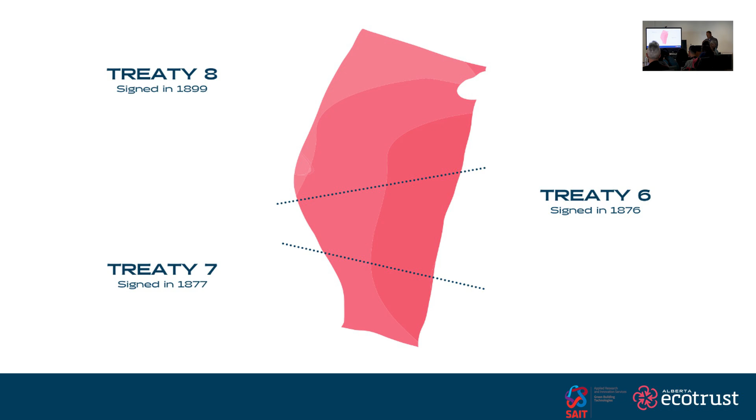So let's start with the land acknowledgement. We acknowledge the traditional lands and territories of the Indigenous peoples who have lived on these lands and cared for them since time immemorial. We make this acknowledgement as an act of reconciliation and gratitude to those whose territory we reside on or are visiting. What became known as the province of Alberta in 1905 is also the traditional and ancestral home to many diverse Indigenous peoples, including Treaty 6, Treaty 7, and Treaty 8 nations: the Blackfoot Confederacy, comprising Siksika, Kainai, and Piikani First Nations, the Cree, Dene, Nakota, Saulteaux, and the Otipemisiwak Métis government. We are grateful for the traditional knowledge keepers and elders who are still with us today and those who have gone before us.

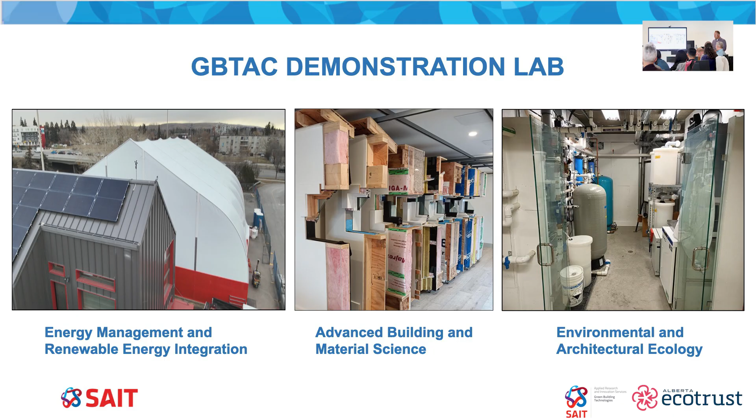We also focus on environmental and architectural ecology. That picture is a little water lab we have in our building. In the gray structure, we have a 35,000 liter cast-in-place concrete rainwater cistern. We use the water inside the building to flush toilets, and there's overflow space.

A couple other areas we've expanded into are testing services. On the left is the environmental weathering chamber. This would simulate both indoor and outdoor conditions with a wall sample about 9 foot by 9 foot sandwiched in between, and the HVAC on that side represents the exterior conditions, so warm to cold.

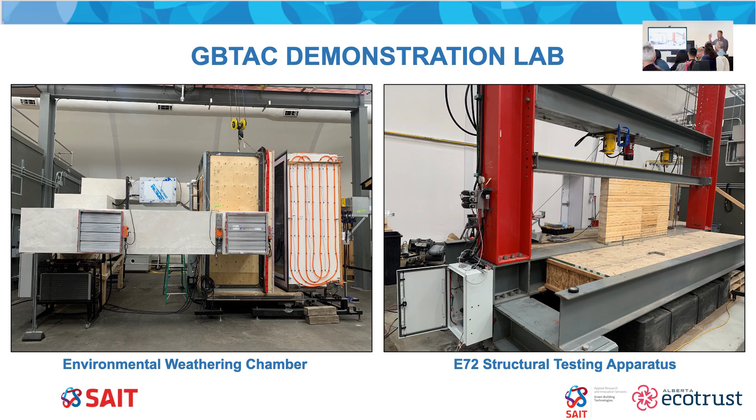Our first test was with Sprung Structures—this is the structure itself housing that test, and we tested a new membrane system for them. We got down to about -29 on that side. So we embedded the wall sample itself with a through-wall sensor stack.

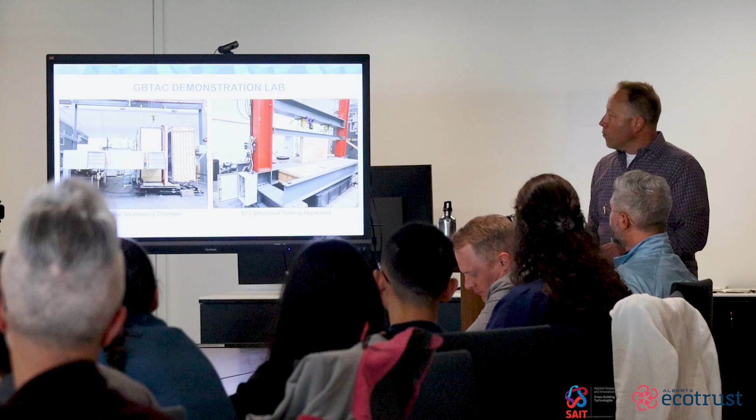We're just finishing up recommissioning of this E72 structural testing apparatus, and that's for compression, primarily compression testing.

With that, this is just showcasing our involvement in the Retrofit Accelerator project under the Ecotrust. One part of this is the Retrofit Discovery Sessions—this is our 7th of 8. We set it up as 3 in person in Calgary, 3 in person in Edmonton, and 2 online sessions.

Another part of our project is this market and gap analysis. We've focused on these main topics, but all related to the commercial retrofit.

I'm going to focus on talking a little bit more about the museum and our goals and objectives for the renovation. And I'm going to leave it to my esteemed colleagues who know much more about your areas of expertise to get into the specifics about how we've created and renovated a building that's much more sustainable and thoughtful in terms of how the building operates and how we're making sure that we're being a good steward and a good contributor to a better environmental future for everyone.

So let me talk a little bit about the Glenbow. As was mentioned, I've been here for 18 years. I honestly can't quite believe it. But when I think that actually I've spent almost 7 years working on this renovation project, it doesn't sound that bad, hey? That's how you get to 18 in pretty quick order.

Let's start at the beginning of the renovation journey. Glenbow, for many years, had on its radar that we needed to renovate this building. It's really difficult to get capital funding to renovate cultural spaces, and what's happening right now in our market is pretty extraordinary. I think we should all rejoice in the fact that governments of all levels and community members from all parts of Canada are investing in these big cultural infrastructure projects happening here at Glenbow, at the Werklund Centre, what will be happening at Contemporary Calgary, the Event Center.

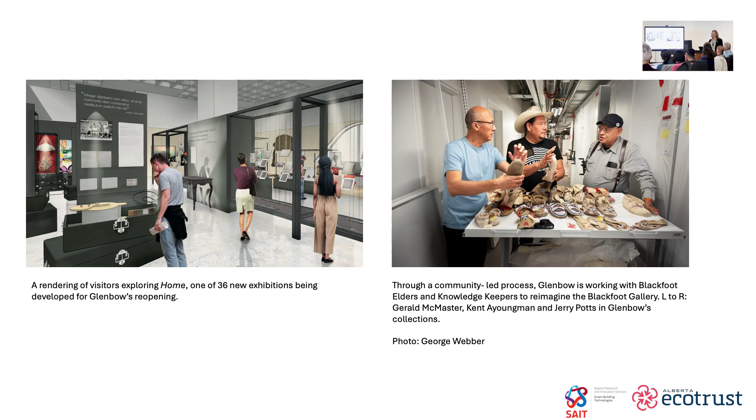In that back corner where my colleagues are sitting, we took out an exit stair. Dialog's vision, one of their early big moves for the museum's future: take out that exit stair and create a front door, which we didn't have before at street level. These sound like simple things, but really important. When you're a nonprofit, you better have everything working in your favor, because life's hard enough on all the other fronts, so let's get a front door. So that was a big win for us.

But we also have a collection that we have stored on site here. And we kept it on site throughout the renovation, and I know that was probably a daily challenge for everybody. Regan will maybe speak to some of that. But we also had to make sure that how we were renovating this building was being done to maintain our commitments as stewards of the 250,000 objects that we kept on site here throughout the renovation.

And one of the first projects that we did as part of the renovation was to move all of our collections into new compact high-density storage systems, which you'll see a little bit on the tour. We also had to think about, in addition to the other things as part of our work and the renovation, how is it supporting our operations.

Also on the financial side, about 30% of our funding comes from the province of Alberta. The rest of it is all earned and donated revenue. So what that speaks to is, again, coming back to making sure that we have a building that's been renovated to actually work for the organization and the community.

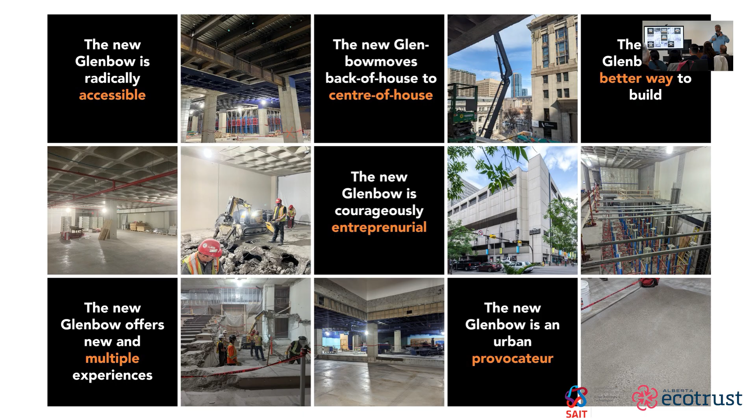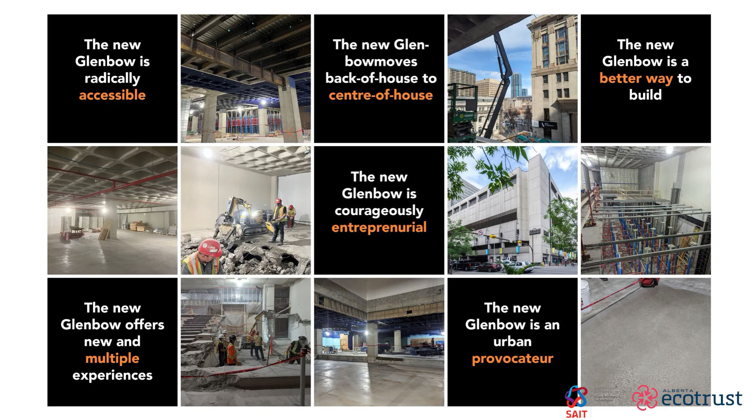So these are the 6 primary goals that, with Melanie and the rest of the team, we really focused on. So the new Glenbow is radically accessible. The previous Glenbow didn't have gender-neutral bathrooms. It had difficult ways of circulating through the museum; from elevator to stair was very disjointed and not democratic, so we alleviated that. The new Glenbow moves back of house to center of house. We wanted all the inner workings of the museum to be expressed as part of the artful experience, not just specifically in the exhibitions and galleries.

The new Glenbow is a better way to build. I've just relayed to you the amount of carbon that was saved and prevented in this building, as well as creating a building from an envelope that had 1 inch of insulation to a building that now has 6 to 8 inches of insulation on the exterior, allowing the mechanical systems to breathe a little bit more and allowing this building to function on a higher performance level. The new Glenbow is courageously entrepreneurial.

Like Melanie said, this is a non-for-profit organization, and we wanted this building to generate its own revenue by creating opportunities where Melanie and the rest of the Glenbow team could come in and rent portions of this building, making it completely accessible to all members of the community and the public.

The new Glenbow offers new and multiple experiences. I'll say this many times on the tour, but one thing I love so much about this building is if you were to design a similar building with the same type of program and function of the Glenbow as a new build, you would never get the types of spaces and the creative kind of relationship between spaces as this building offered us during construction. You'll see that when we hit certain locations like the Cube Gallery, the Salon Gallery, the Theater, and the Vertical Gallery. Those are all very unique moments and spaces that no new museum would ever even imagine to create.

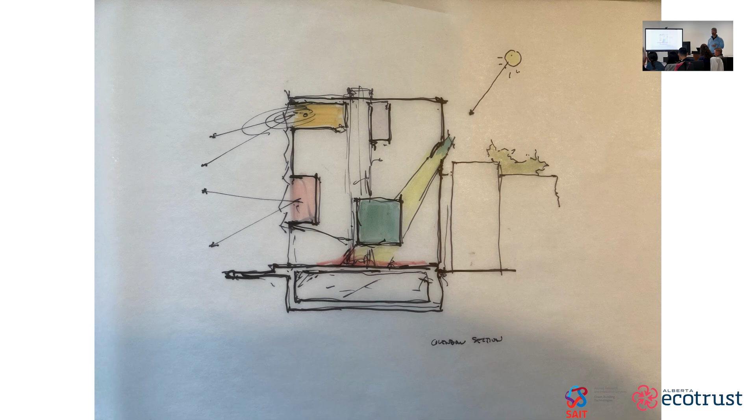This is a quick sketch. I will again say this on the tour a lot: we considered this building a pancake building. Everything was flat. There was no volume, no experience, and no kind of relationship between the various floors in the building. Our goal was to open it up, not only through the exterior, but also in the interior, giving Melanie and the Glenbow team a new offering of different spaces that allow the collections to be expressed in new and exciting ways.

So this is the new building. What we want to do here is quickly run through the architectural process. We took this building, cracked the facade open, and exposed all of the inner workings. We removed everything from the building, from the facade to the inner walls, everything down to its base structure.

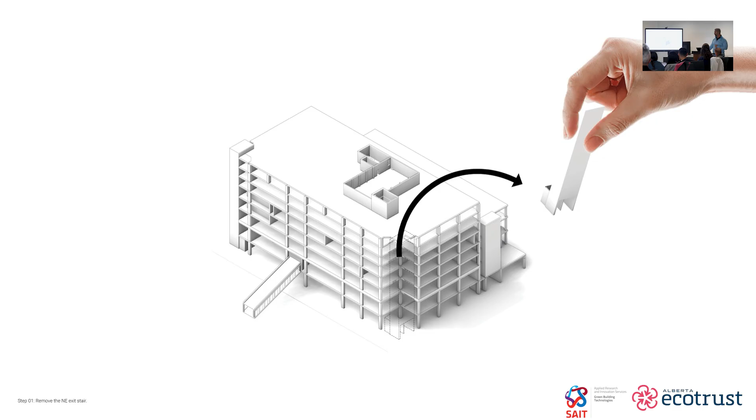We removed the Gordian knot, as my colleague Robert Claiborne calls it, the northeast stair. This was probably the most expensive and most rewarding move in the entire design and construction process, and the complexities of it are so vast.

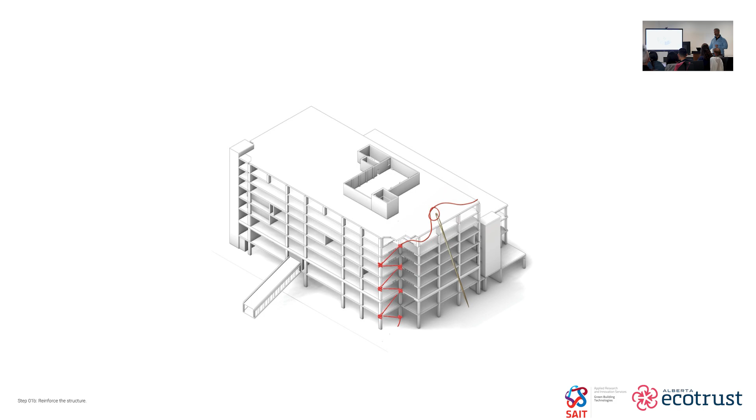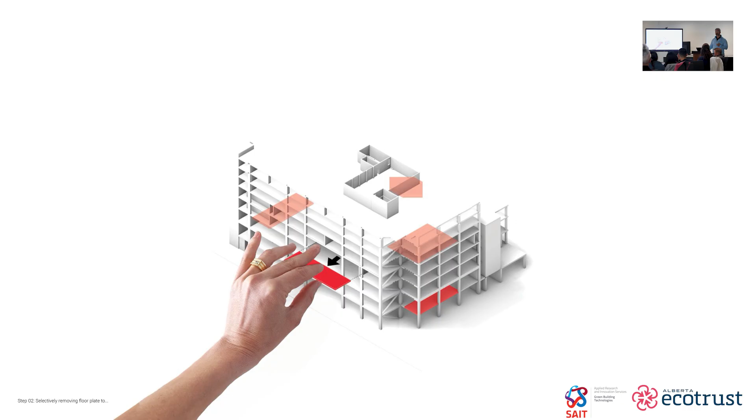By doing that, we had to stitch the building back up. Nyell wouldn't let us just have it floating there, so we had to add new structure to this building. Then we started to remove floor plates and create new and interesting volumes throughout the building, such as you can see here.

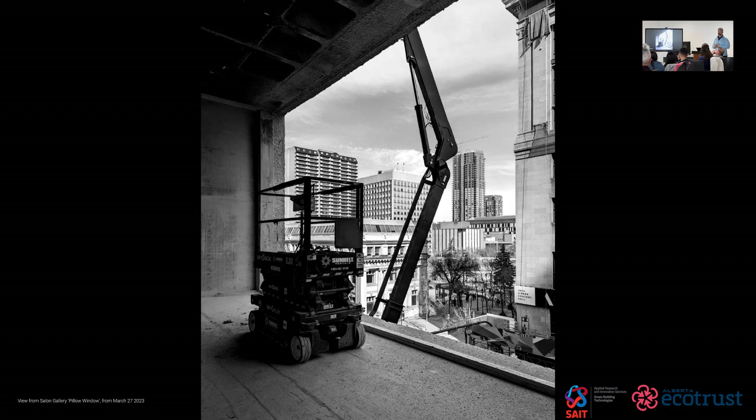This is one of the very first shots I took on site when we got to remove the exterior facade. This was a very important moment architecturally for our team, because it was the first time that Glenbow really started to interact with the urban environment. The urban environment was coming in while Glenbow was coming out, and it was this really exciting moment for us to know that we were actually going to achieve something we'd been planning for a very long time.

A little bit about the facade before I pass it off to my colleagues here. When we looked at the facade, we wanted something in a building that had more questions and offered more stories than gave more answers. So we came up with this term 'fuzzy,' because we didn't want it to give off the same kind of experience on any facade. We wanted it to drastically change all day, every day, all year round, depending on how the sun interacted with the facade, creating a shifting moment along the cladding that allowed it to change momentarily.

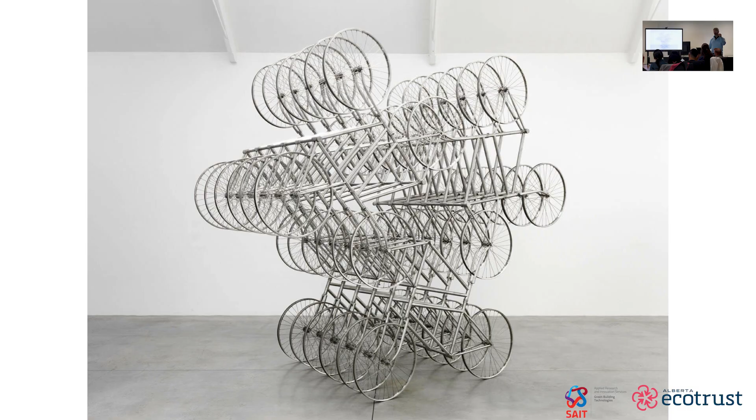We got a lot of inspiration from Ai Weiwei's interesting artwork, where he took singular items and put them together, and through that different vantage point and layering, you start to see something completely different. You start to question why you're actually seeing what you're seeing, as opposed to saying, oh, it's just a bike. So we tried to really do that with the facade. These are examples of the 3D prints that we did.

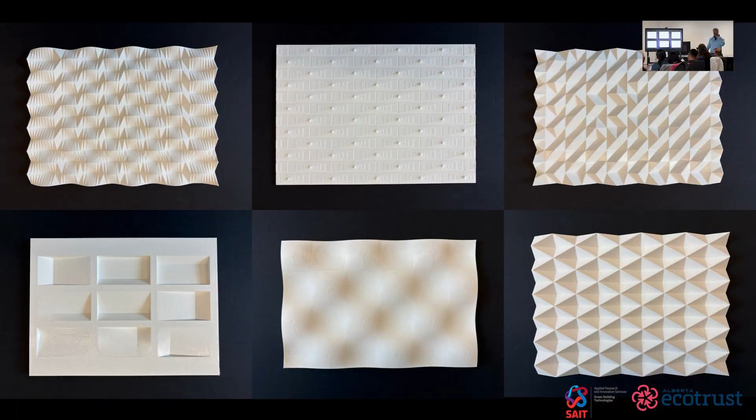We probably did about 150 different test prints of the facade cladding, and we started to get a little bit closer to where that fuzziness existed—something where the blurred lines, you don't know what is shadow versus form, what is light versus dark.

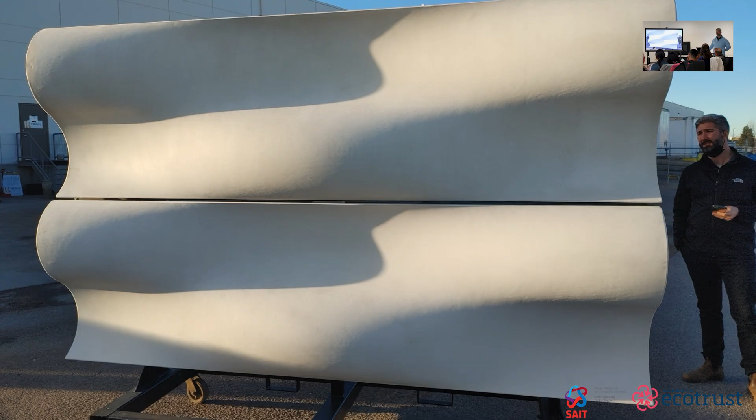This is when we started to do one-to-one scale mock-ups of the building cladding for the facade, and you can see how the sun is really interacting and playing on these panels. Imagine that just from these two, and then extrapolate that interaction over an entire facade of 8 stories.

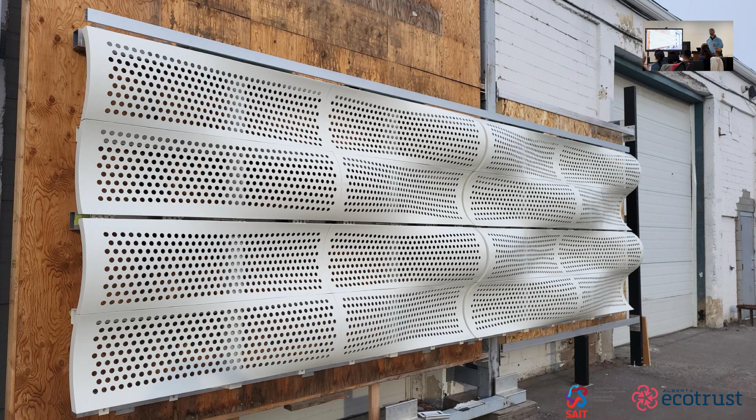We also had to integrate metal panels, since Regan had his own requirements for this facade. So how do you start to integrate a really robust, soft, malleable material like concrete with something that required 50% perforation and also matched those panels very closely?

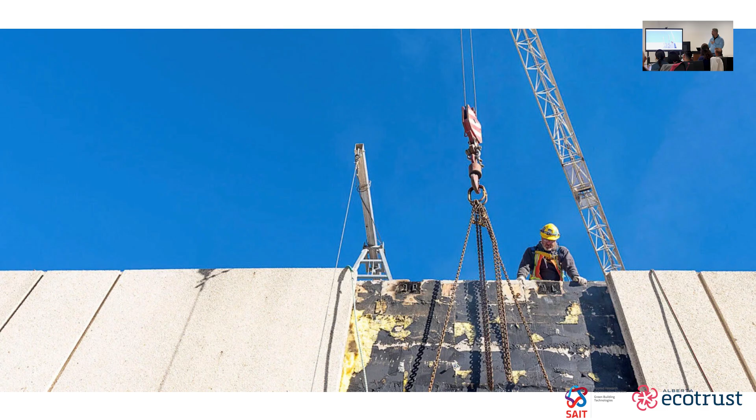These are just some quick images. Marta's going to get into that development of the building envelope, and you can see how rough a shape the existing building envelope was in when we started to remove those precast panels—something very difficult over the construction process to mitigate and make sure our envelope was extremely robust. This is us moving very strategically around the building as we developed and rebuilt that facade, and these are the finished images you see today.

This is our northeast corner of the boardroom here, just north of where we're sitting. This is all new structure in that location, with very interesting volumes, which I'm taking a tour of.

But this was a very important moment for Glenbow to reintroduce themselves into the urban environment and give them an incredible space to relocate their work.

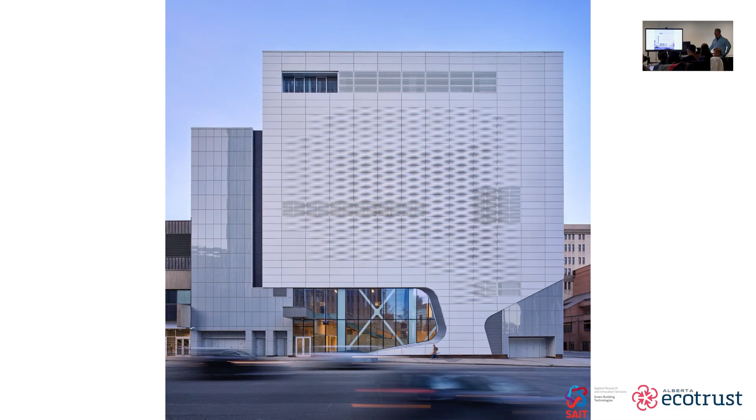This is the south elevation, where the theater is the most prominent piece of the facade. This is the northeast corner.

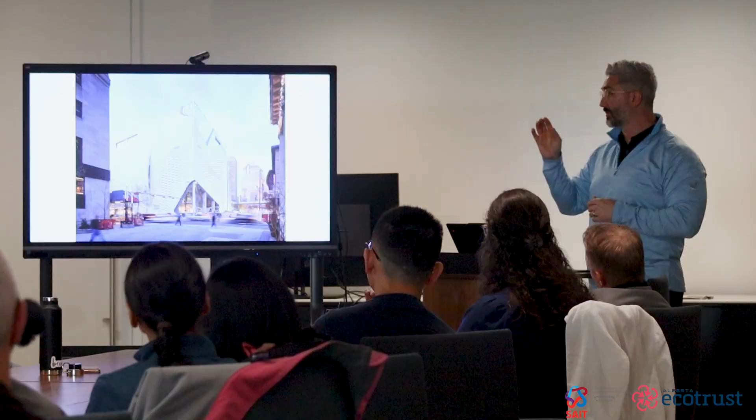Removing that northeast corner allowed us to open up the northeast entrance, providing its own entrance for the very first time. This was the most specific element where we engaged with the Indigenous community. They had a very big part of this entire project, and this was so important because at a very specific moment in early June, around 5:30 in the morning, the sun comes up exactly in that location and funnels its way through the building into the Calgary TELUS Convention Center. So there's a very strategic reason why this is exactly due east.

And then just some very provocative facade shots of the cladding. I'll pass it over to Marta.

Hi everyone, my name is Nyell Tuchscherer, as Dean has pleased. I'm a project engineer at RJC Engineers and I've been at RJC for 14 years now. It's been an honor to be part of this project—challenging, as everybody's alluded to, and very rewarding as well.

I'll speak a bit to the structural challenges we faced and what we performed with hybrids here. Just a quick overview of the building as a whole—a picture of our drawings. The one on the right in red is all of the demolition we underwent, and the portion on the left is the new structure we introduced.

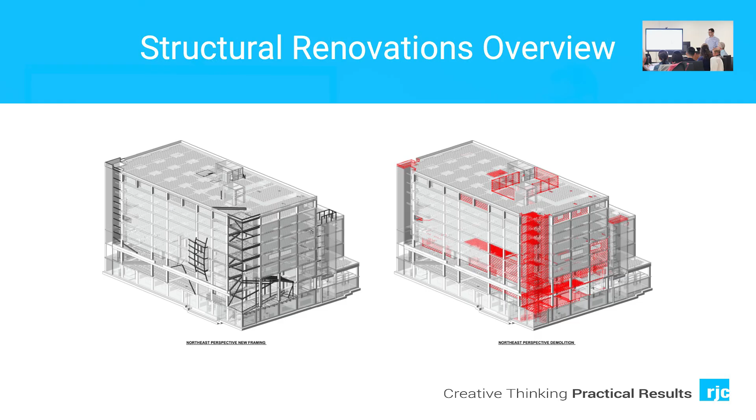As Kyle indicated, the big challenge of the project was removing the northeast stair. That formed more of the lateral system, stabilizing the building from wind loads and lateral loads, so by removing it, we had to reinstate that stability in some other method. We introduced bracing and additional walls, but the sequencing of that over construction, while allowing EllisDon to continue the renovation elsewhere, meant we had to sequence the floors working top-down and slowly introduce the lateral system back in.

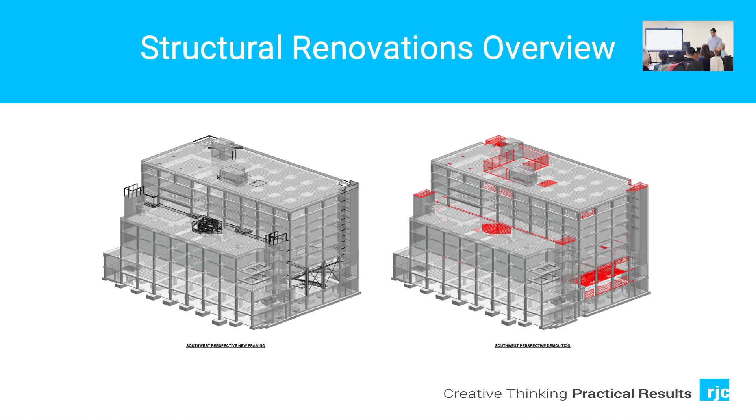We took out a portion of the waffle slab, and in doing so had to reinstate some of the structural capacity by putting in steel framing below. We worked with Dialog to optimize that and make sure we didn't have to introduce as much steel as we initially thought, trying to keep costs down, keep our carbon footprint down, and still achieve the end result, which you'll see later today.

The northeast corner, we also took out a portion of the floor to add the entrance. It's a double height space there, creating the wedge gallery, which you'll also see later today. This is the framing we introduced, with diagonal sub-framing that allowed us to reinstate the slab capacity in the adjacent bays because of removing the bay to the south.

On the level 3 portion, there's an existing double bay span, around 18 to 19 meters, consisting of post-tensioned slab. All the high stress strands had to be decommissioned, slowly cutting one strand at a time because they're under high stress, then cutting out that entire span. We worked with Kyle and his team to optimize the best location for that, so we weren't impacting the structure around it. It was a very rewarding sight when it came down, seeing that slab removed and the amount of space it gave to the museum.

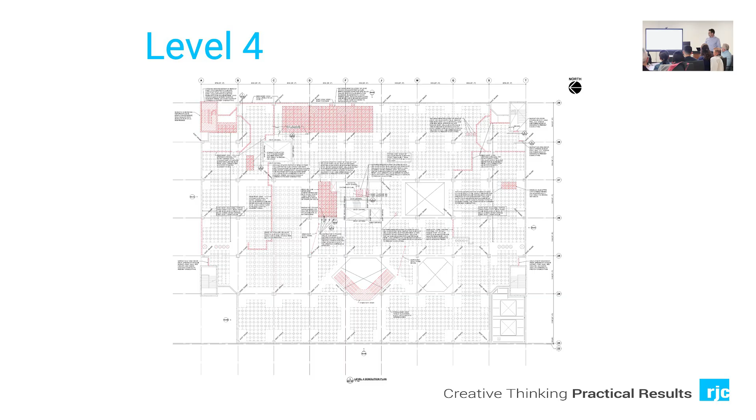Next is the level 4 space. On the northeast corner is still the stair being removed. On the east side we introduced the double height space for the salon gallery, plus the bump out or pillow window to allow light to come in. All of those spaces posed a challenge. This one in particular, we had to deal with the wind loading on this wall and the columns that were there before—they weren't designed for that 2-story wind load effect, so we had to introduce new framing.

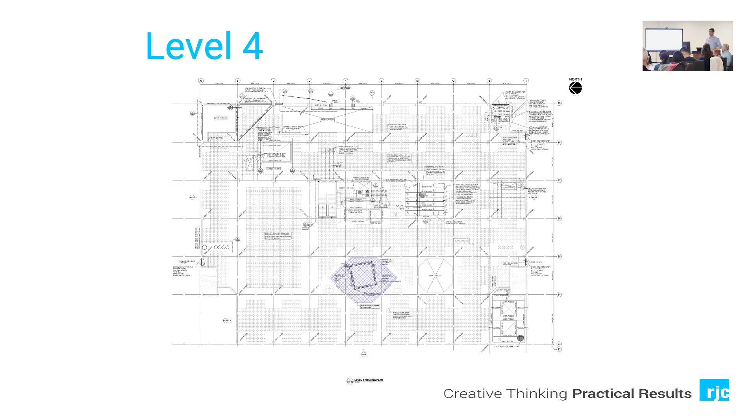On the lower floors, we introduced column jacketing, meaning we put 6 inches of concrete around the existing columns just to stiffen them up and make sure they could take that load.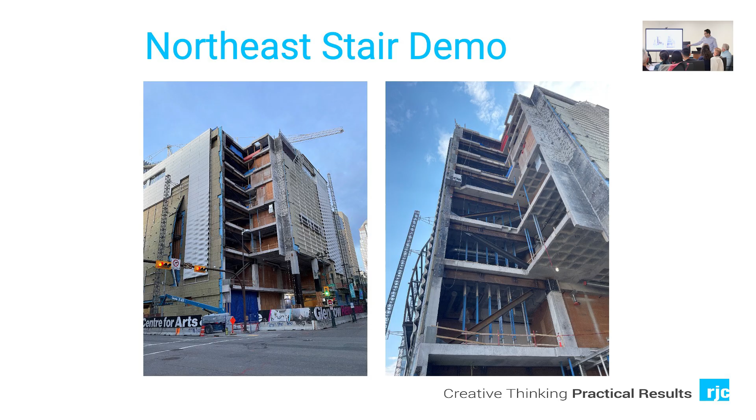Now I'll share some photos I took along the way of the renovations, because it gives a better picture of the transformation. As you can see here, this is the northeast corner with the stair removed and some of the new steel bracing that's gone in just to reinstate that lateral system.

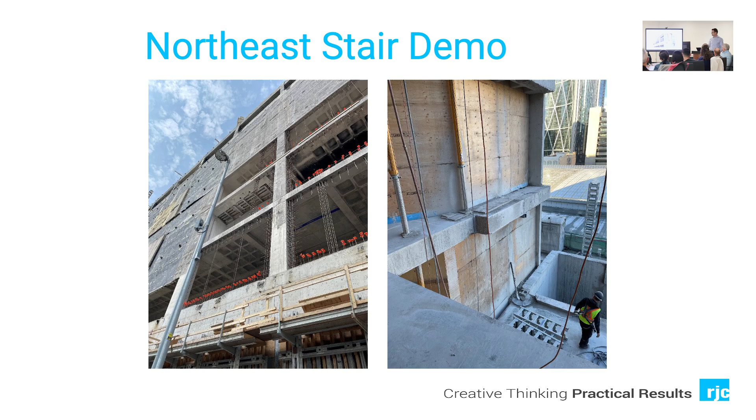One photo I found quite interesting—I took it on site when they were cutting the wall out and they managed to get their large blade stuck in the wall, so they had to demo the wall down to that portion just to get the blade out. It was pretty entertaining to see that.

Kyle shared a photo of it before, but opening up that east wall—one of the unique features of this building is an 8-inch concrete wall all the way around the entire building, going from basically level 3 all the way up. We've poked holes through this wall, but it's very robust and acts as a lateral system because of that, so we had the opportunity to introduce some openings on the upper levels.

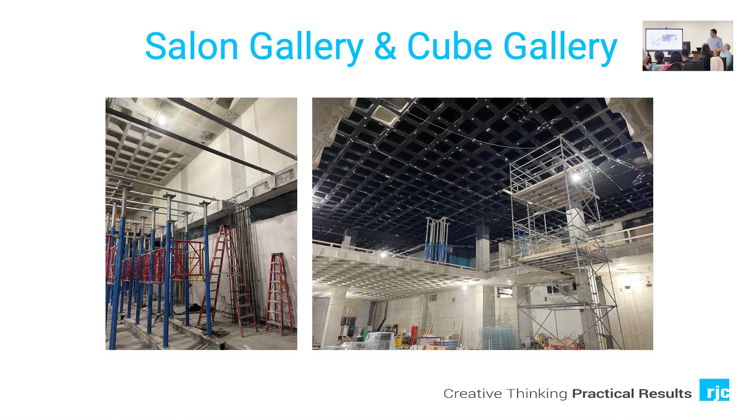Salon gallery, cube gallery—we'll see more of this today, but this is behind the scenes before all the finishes were replaced. Here you've got the PT slab that was removed, and you can see how much space it gave the facility. On the left is the salon gallery, on the east side of the building, forming part of the pillow window.

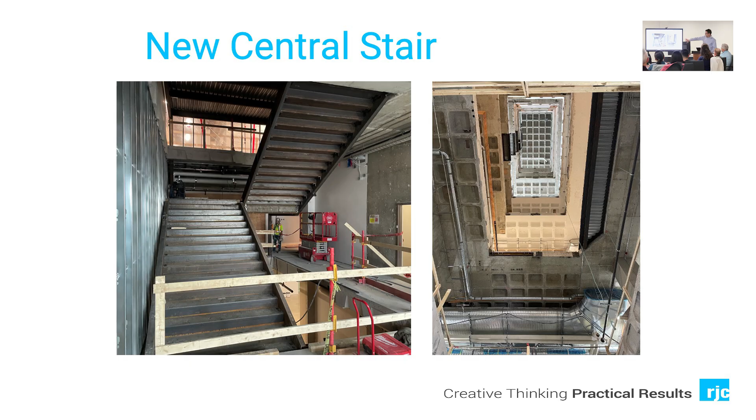New central stair—I didn't touch much on that, but that was another space where we introduced a full height stair in the middle of the building. This is looking up at the opening we put through the waffle slab. Rather than using steel to subframe that part of the building, we used FRP strapping, which is very environmentally friendly with less carbon footprint—it puts straps on the underside of the waffle slab and reuses the waffle slab to its full potential.

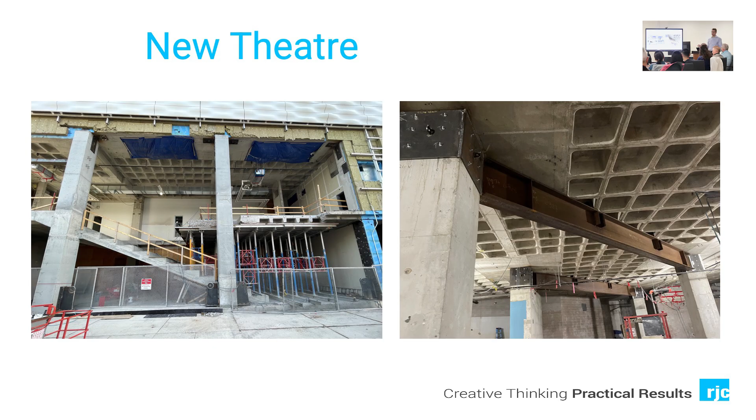New theater, here again, the cells portion of this is shown on the left, a portion of it being demoed. The challenge with pouring a new bleacher in this space was that the main floor slab is only an 8-inch slab, not a waffle slab like this, so we weren't able to form the bleachers directly on top. We had to suspend the formwork from level 3, so it was all hung as we were pouring concrete, and then later we demoed the rest. So a portion of level 3 was used to support the bleachers, and then a portion of level 2 that remained was also used to hang the bleachers.

Thanks everyone for coming. I'm going to set a timer because I could probably sit here and talk about this project for days, but I bet everyone else wants to see the building, so that's why you're all here. Again, my name is Regan Moffat. I'm a principal at Smith Andersen, and we were involved in the mechanical, electrical, AV, and comms for this project.

So Mel mentioned before, this was the most challenging project I've done in my career. I think I've found my limit of challenging projects. I'd hazard to bet you could not get a more challenging retrofit project, based on the last 7 years we've gone through on this project, and the building typology, all the little side stories and complications that went on over the years. So the complexity of this project, I can't really give it justice. There's a lot going on.

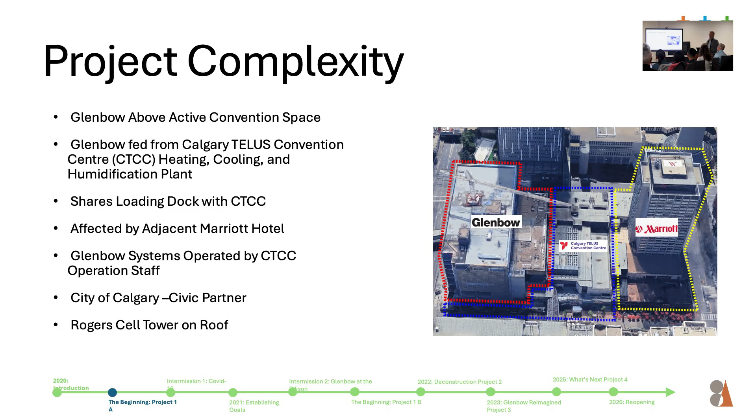We have a bunch of different stakeholders involved in this project. Obviously Melanie on the Glenbow side, Convention Center is the operator of this building on behalf of the Glenbow. The City of Calgary - both Convention Center and Glenbow are civic partners, so the City of Calgary is also a partner in it. And then finally, to throw another wrench in the whole thing, we had an operating Rogers cell tower located on the roof that needed to maintain operation throughout the renovation project.

Mel mentioned that they kept the collection in the building itself while the major renovation happened. So we had to consolidate that collection - Alison and the team consolidated that collection to a couple of floors while they pulled off the exterior facade on the building, like I mentioned. That collection needed to maintain plus or minus 2 degrees Celsius, plus or minus 5% RH, essentially with no building envelope, and mechanical systems that were being phased, sequentially replaced throughout this whole process, because the mechanical electrical systems were at end of life cycle, like Melanie mentioned. So again, I think I've found my limit of complexity, but it is a good example from a retrofit standpoint.

If we can do something like this to this building, I think anything is possible with these existing buildings that are in their life cycle and need replacement. From that standpoint, I think it's a great learning and example of what makes a successful retrofit happen.

So I'm going to quickly talk about sustainability. One of the things we were obviously doing is renovating this building. It's 1970s vintage, mechanical systems were original, 1970s vintage, not a lot of redundancy, completely life cycle, and not very efficient.

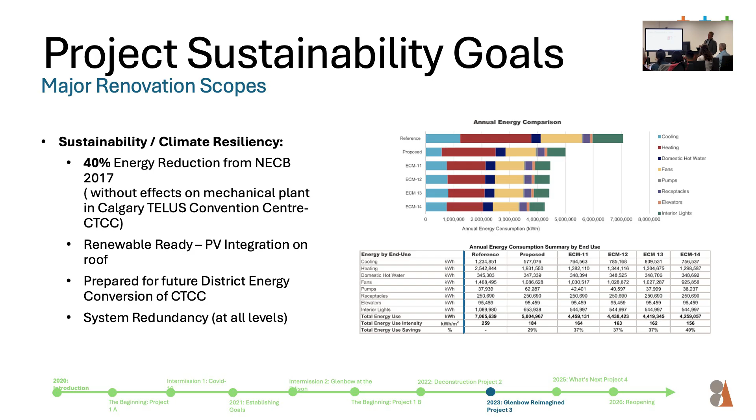So what we did is go through a series of parametric modeling. We built a reference model and started looking at a bunch of energy conservation measures to see if this is something we could achieve. In the end, through a bunch of different iterations, we managed to get to that 40%, which I think on a project like this was a pretty big accomplishment in my mind.

This doesn't get talked about a lot - everyone wants to talk about the exterior building and all that stuff - but the fact that we managed to achieve that energy reduction is, in my mind, in my experience, a pretty big deal.

The other piece is that energy reduction came without touching the mechanical plant. We did nothing to the convention center side - didn't touch any of the pumps or boilers on that side, just left everything as is. We weren't really able to get any energy reduction from plant upgrades. Everything came from what was in the Glenbow itself: exterior facade, insulation, controls, some of the ventilation strategies.

One of the main energy conservation measures we did was energy recovery, or heat recovery, on the ventilation air throughout the building. There were two pieces to that: one, it reduced our energy consumption from the ventilation standpoint; the other is it gives us a bit of control over the air we bring into the museum, and air quality is a huge deal when it comes to museums.

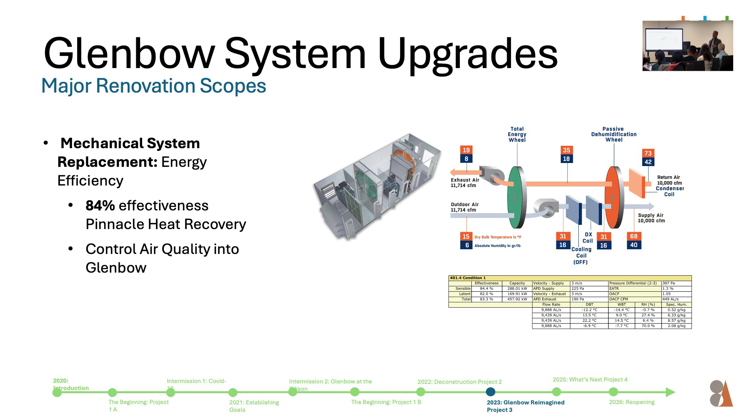One of the big concerns we had was that we do have fairly good air quality in Calgary most of the year, but in the event of a big wildfire season or something like that, we want to be able to control what we're bringing in. By having a heat recovery system that recovers both sensible and latent heat - humidity and temperature - we were able to also control the quality of air coming into the building.

This is all controlled - the whole system adjusts the outdoor air brought in based on occupancy and indoor air conditions. It's built into a control system that automatically adjusts to suit the requirements of what's happening in the space itself. That was a big energy measure on top of the envelope, which is probably the biggest one.

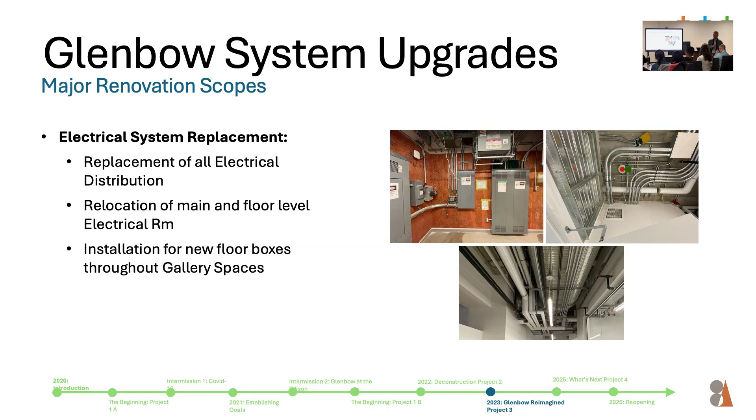Mechanical and electrical upgrades were again all life cycle. We had to basically rebuild the electrical system in the building, coming up with a strategy of consolidating a lot of the electrical rooms into a central core, making it more efficient. With this building operating throughout the whole renovation, we had to do the phasing and sequencing of building new electrical rooms, getting them ready while keeping the existing ones running, and then doing a cutover. These were all sequenced through the construction phasing by Alston and subtrades.

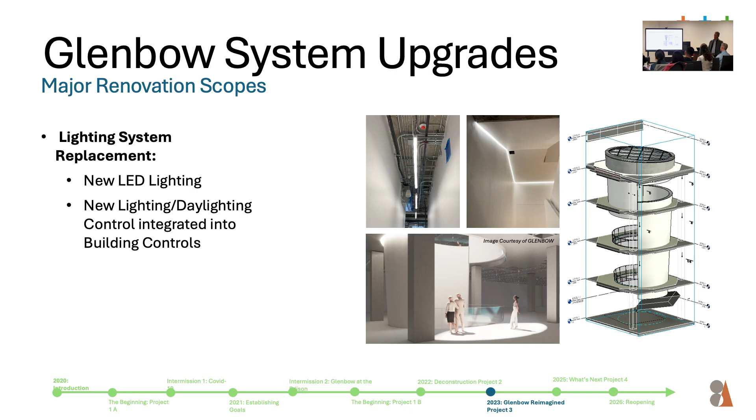We talk about lighting again - I won't go into detail, you guys will see it here. There are some amazing ways that we got natural light into the building. Kyle mentioned it was very much a pancake before, not a lot of natural light in this building at all previously. A lot of it came through architectural elements - we came up with some pretty interesting ways to daylight this building.

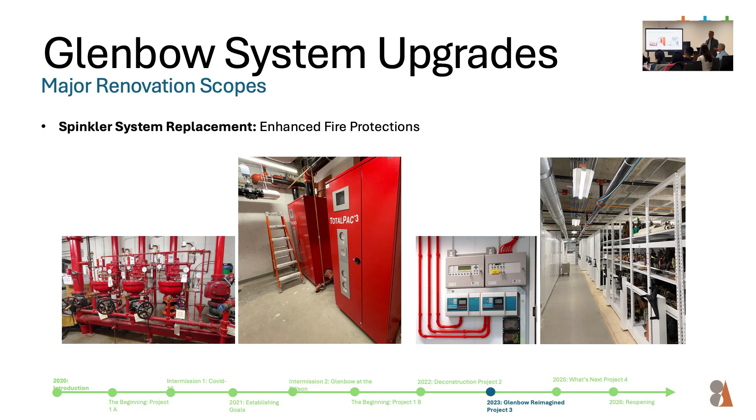And then fire protection, life safety systems. Again, being a museum and important to the collection, there were a lot of systems that we added, giving the Glenbow more redundancy, giving them more reliability. Early detection systems, so if you see this red piping running in the ceiling space, that's an early fire detection system that monitors any kind of smoke in the building. It'll set off an early alarm.

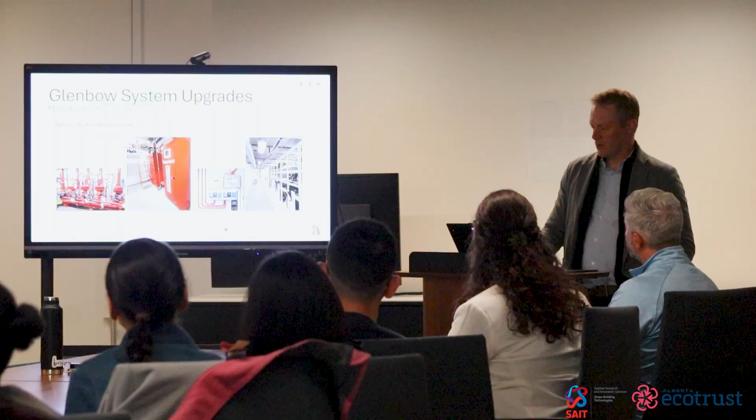So lots of system upgrades to help both on the energy side as well as giving the Glenbow a little bit more resiliency and redundancy within the other systems over there. So with that, I'll pass it on to Marta.

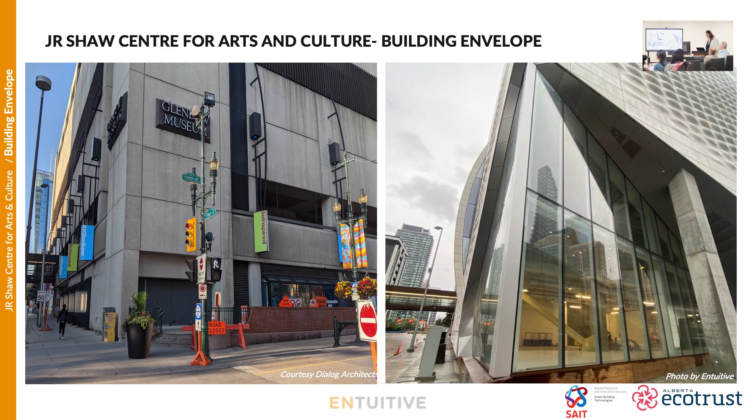So, as you can see from those two images on the screen, the new JR Shaw Centre for Arts and Culture is a project of transitions. It's transitions between old and new, interior and exterior. And of course, building envelope being the science of transitions means that we rose up to the challenge. Of the challenges we had, I would like to focus on four today.

One, as previously mentioned, is upgrading the 1970s building to modern performance standards; working with the existing concrete and how it impacted the envelope installation; connection to the adjacent buildings. So we had the Calgary TELUS Convention Centre on the west and below, and we had the Plus 15 pedestrian bridge between the existing Glenbow and the Arts Commons building. And also just in general, design of the building envelope and construction in three dimensions.

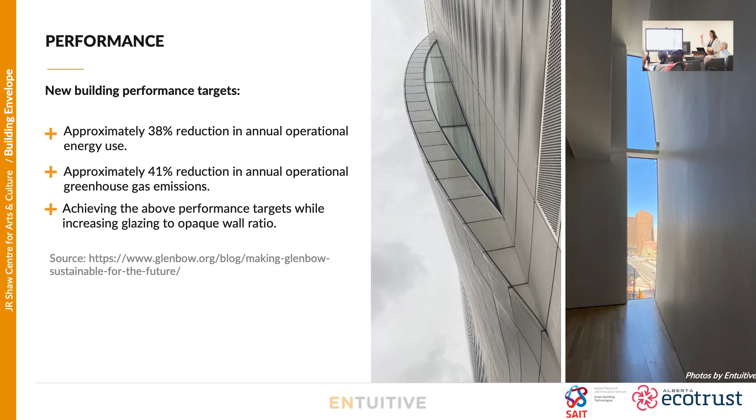The performance targets were previously mentioned a couple of times, but one of the challenges that we as building envelope consultants had to consider was how do you achieve those performance targets while also meeting the architectural requirements and creating more spaces where you have this connection between inside and outside. So here in the images, you have photos of the pillar window from outside looking in and from inside looking out. So you have that visual transition between the inside and outside through the envelope.

But in order to achieve those transitions, more glass had to be installed on the building. I think there was overall an 18% increase of the glass to opaque wall ratio. So how is it possible to achieve those performance targets while also increasing the amount of glass? The main thing that was done is increase the R-value of all the existing components. The existing original design was aiming for 2 to 3 inches of discontinuous insulation.

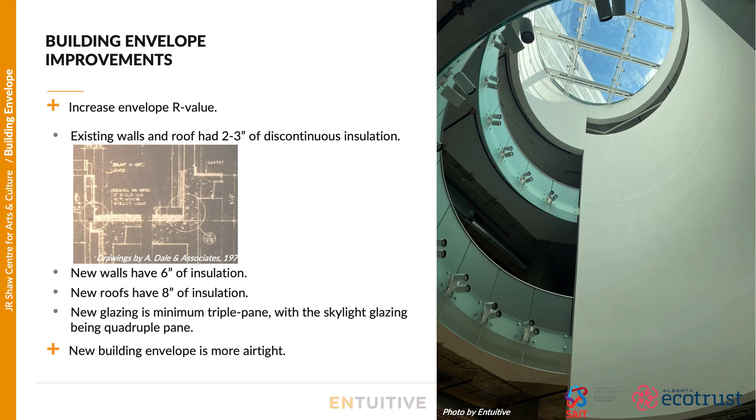So the new walls have 6 inches of insulation, new roofs have 8 inches of insulation. All of the double-glazed windows were upgraded to triple-glazed, and this gorgeous skylight that you can see on the screen actually has a quadruple-glazed IGU system. And in addition to that, the new building is more airtight. In terms of achieving airtightness, that's where the second challenge comes in.

The preservation of existing concrete, of course, prevented 38,000 tons of concrete from going into the landfill, but at the same time, we had to work with that existing concrete substrate and be able to apply new membrane on top of it. The photo on the left shows the existing Glenbow membrane. It was no longer in serviceable condition once the cladding was pulled off. It had gaps, it had cracks, it just was aged and no longer performing.

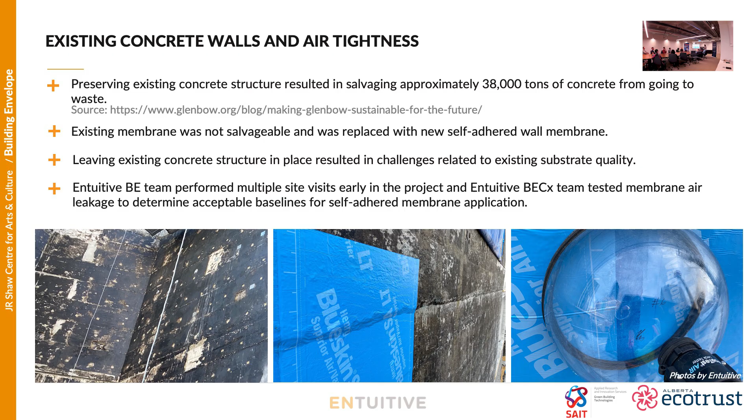So new self-adhering membrane was installed on the exterior envelope, but even so, even if the installation of the membrane was near perfect, as you can see in the middle image, because of the concrete substrate unevenness and sharp edges and a lot of different existing conditions, we had to really focus on visiting the site multiple times at the beginning of the project, as well as working with our commissioning team to do air and leakage testing at the beginning of the project to set those benchmarks for installation.

So there was a little upfront effort to set those benchmarks, but once we had figured them out, I think the installation throughout the project continued much more smoothly. And that allowed us to achieve this airtight assembly.

The third challenge I mentioned was connecting to the existing buildings. And one of the reasons this was such a huge challenge is that we didn't really know what we were looking at until we removed the existing cladding and existing components. So here on the screen, I have the +15 bridge to Glenbow Museum as an example. The photo on the left shows the existing conditions once the cladding was removed.

And of course, we were looking at those big anchors below the +15 that were supporting it, as well as existing steel structure on the side. It's kind of hard to see, but it's this dark reddish existing structure there, the existing framing. So we had to really look at the existing conditions and understand how the geometry of all these components works with our new transitions.

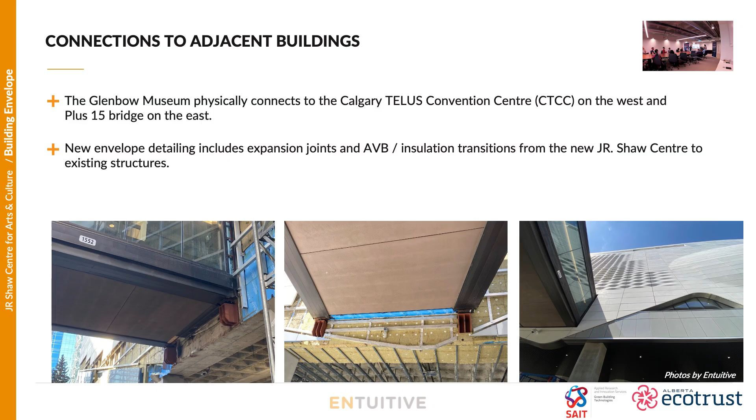The middle photo shows the insulated wall of the Glenbow Museum before it got clad, and the last image shows the final clad. So of course, with the new cladding like this, you wouldn't even know what was happening behind it, and that's the goal.

The fourth challenge that we had to overcome as part of the building envelope consulting is three-dimensional details. One of the factors that both contributed and helped resolve this challenge is the number of envelope-related subtrades that were on this project. EllisDon was the general contractor for Glenbow, and they did an absolutely phenomenal job coordinating with all of the subtrades.

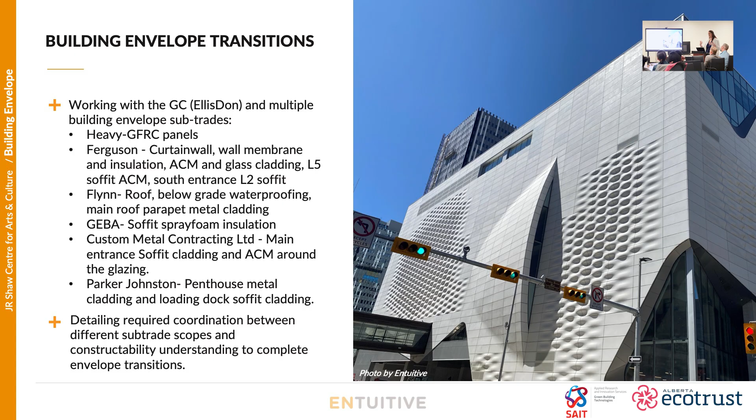Just from the envelope standpoint, we had Heavy, Ferguson, Flynn, GEBA, Custom Metal, Parker Johnston, and I'm sure a few others that I haven't mentioned that were working on the different envelope components, interacting with each other and basically being in each other's spaces during construction. And of course, envelope detailing, being detailing that heavily focuses on transitions, required us to also understand the different scopes of the subtrades, and also to frequently talk to them, meet with them on site, and try to collaborate and brainstorm about the different transition details that we had to deal with.

And I would just like to focus on two details specifically. One is the west terrace entrance. The challenge with this was that the existing building volume was pulled in, exposing the waffle slab to the exterior. And once that became exposed, we had to really think about how to insulate that. There were more than several brainstorm sessions with Dialog, EllisDon, and the subtrades, both on and off site, to figure out what our best solutions were.

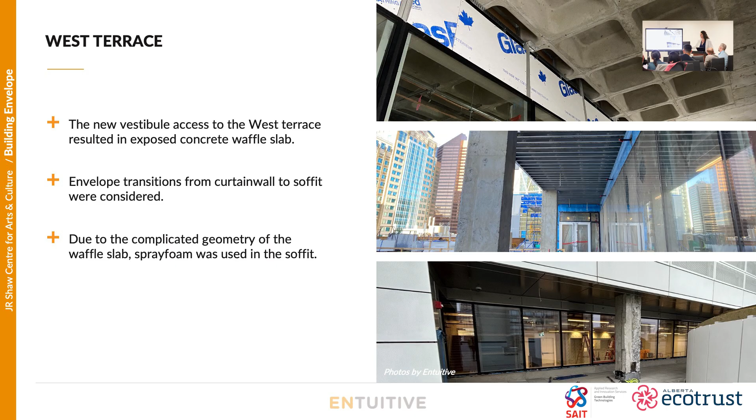In the end, we did go for spray foam to provide air, vapour barrier, and insulation continuity, but we had to understand how that's going to work, both with the exterior cladding outside of the soffit and with the transitions to the curtain wall down below. So just in this one small space, we had at least three different subtrades. We had Ferguson on the wall and curtain wall. We had Heavy on the GFRC. We had GEBA on the spray foam, and we had Flynn on the roof.

And we met with the subtrades multiple times just to understand the sequencing of everyone's scopes, to brainstorm. And one of the reasons I really love Glenbow as a project is that I found that every time we had those brainstorming sessions, everyone from the installers to the site supers to the GCs to the designers had contributed based on their past experience, based on their best recommendations. So it really felt like one big collaborative exercise anytime we were on site trying to resolve these details.

And the last detail I would like to discuss is, of course, the gorgeous northeast corner, which is exactly right there, as Kyle already mentioned. The challenge with this corner was that, with the east staircase being smaller, the roof assembly in that corner was installed later than the roof assembly at the main part of the building.

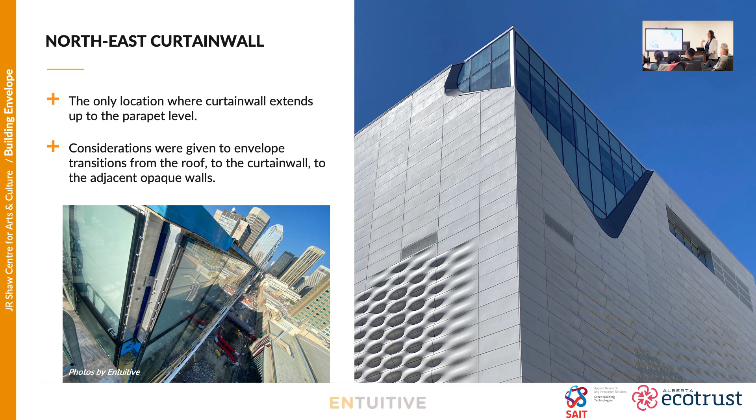So we had to consider the transitions between the northeast corner roof to the adjacent roof, but we also had to consider the transitions between the roof assembly and the curtain wall. This is the only place on this entire building where the curtain wall extends past the roof slab and goes all the way up to the parapet. So we had to really think how that roof vapor barrier transitions onto the wall and the curtain wall, how the curtain wall transitions to the wall adjacent to it.

And it's a lot of fun to do that when you're hanging on the side of the building 8 stories up. But again, through the collaboration with the team, and by doing several meetings before this corner was constructed, understanding the shop drawings, reviewing shop drawings with the installers, and being on site a few times just to understand how the actual as-built conditions work, we were able to, I think, build a really robust detail that is also really aesthetically appealing.

So to conclude, although we did have a few challenges from a building envelope standpoint, it is through collaboration and everyone's ideas that we were able to resolve this. And I think that, again, the final product that was provided is a big part of having not only a very talented design team, but also a phenomenal general contractor and all of their efforts in collaborating with all of the subtrades, and all the subtrades being really on board, really proactive, thinking of solutions, really creative. And I think that's why, again, this is one of my favorite projects. Thank you.